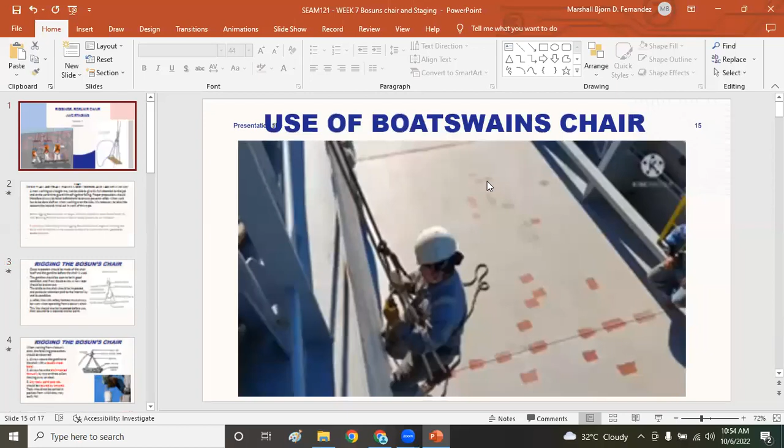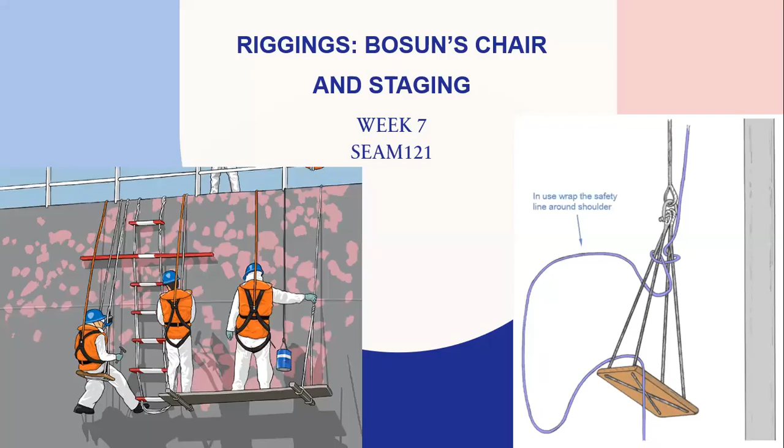Our topic is about the rigging of bosun's chair and staging. These are the learning objectives: identify safe and unsafe practices when working aloft and working overside.

A man working at a height may not be able to give his full attention to the job and at the same time guard himself against falling. Proper precautions should therefore always be taken beforehand to ensure personal safety when work has to be done aloft or when working over the side. It is necessary to take into account the hazards involved in work of this type.

When rigging bosun's chair or stages, when we say stages, gentlemen and ladies, it's about the gondola. The term for that is gondola, and bosun's chair is different. With the gondola, it utilizes or requires two persons.

Reference should be made to the Code of Safe Working Practice to ensure that all safety procedures are followed. It should be noted that prior to rigging bosun's chairs or stages, or carrying out working aloft or working overside, a risk assessment should be conducted and permit to work obtained.

So gentlemen and ladies, those are the documents needed: permit to work and risk assessment. That document is prepared by the Chief Officer for the deck crew or deck personnel led by the bosun, of course.

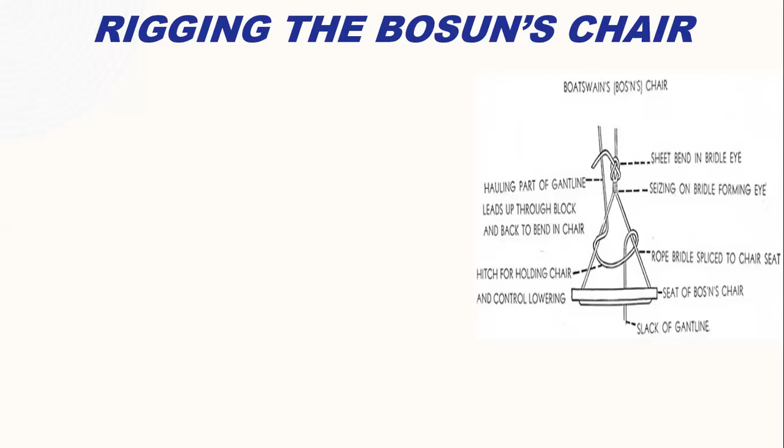Close inspection should be made of the chair itself and the gantline before the chair is used. It means you should do visual inspection. You will check those lines if it has a lot of abrasions or some strands that are broken, or probably the wood or wooden chair is already broken or has some cracks on it.

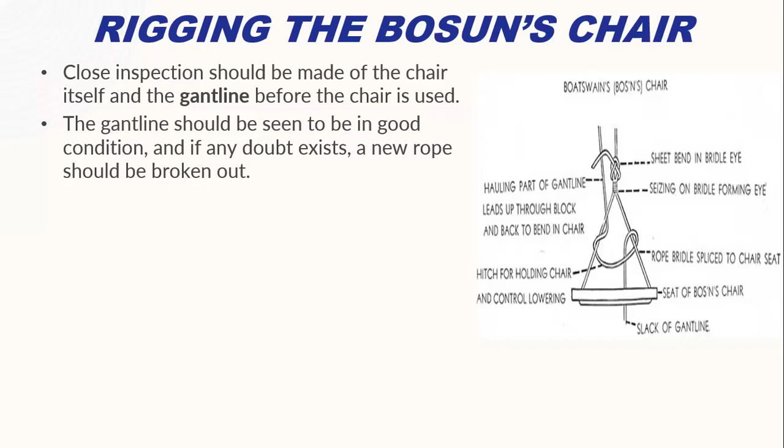The gantline should be seen to be in good condition. If any doubt exists, a new rope should be broken out or taken out. If it requires new rope, then use a new rope. The bridle to the chair should be inspected and particular attention paid to the internal lay and its condition.

Safety line with safety harness must always be worn when operating from a bosun's chair. For the purpose of safety, it's not safety belt anymore, but safety harness. When you wear a safety harness, it ties all around your body, so that is much safer. Even though you are riding the bosun's chair while probably painting or working aloft, you need to wear safety harness. That's for emergency.

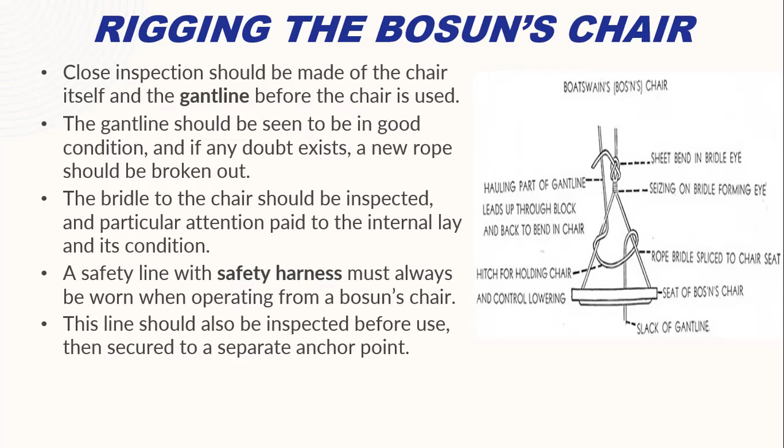This line should also be inspected before use, then secured to a separate anchor point. When you say separate anchor point, it is fast in a strong point on deck, so even if you fall, it is capable of withholding your weight, saving you from harm.

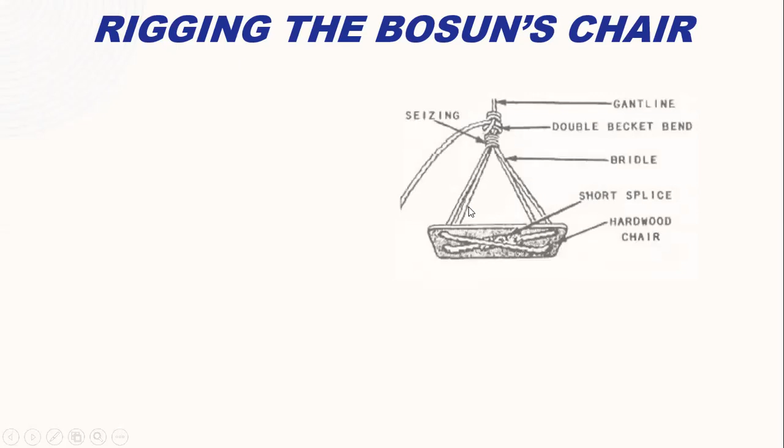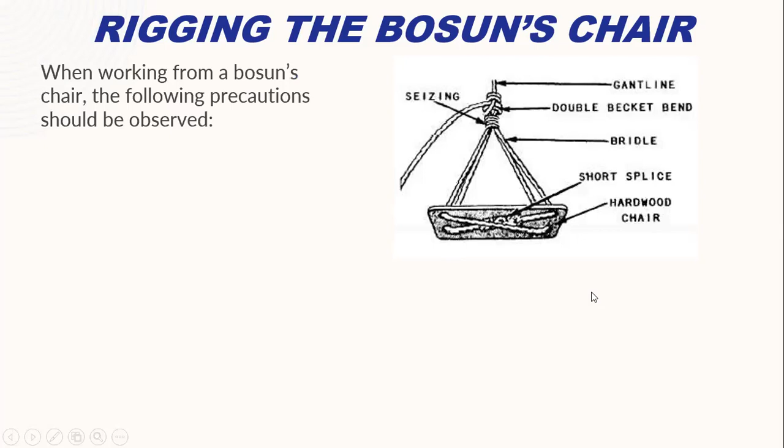Rigging the bosun's chair: there's a gantline, double becket bend, bridle, short splice, hardwood chair. When working from a bosun's chair, the following precautions should be observed. Always secure the gantline to the chair with a double sheet bend.

Always have the chair hoisted manually by two or three sailors heaving away on deck. Any tools, paint pots, etc., should be secured by lanyards. Tools should not be carried in pockets from which they may easily fall. So, for example, if you are painting, it should be tied in a heaving line, separate from yourself and from the bosun's chair itself.

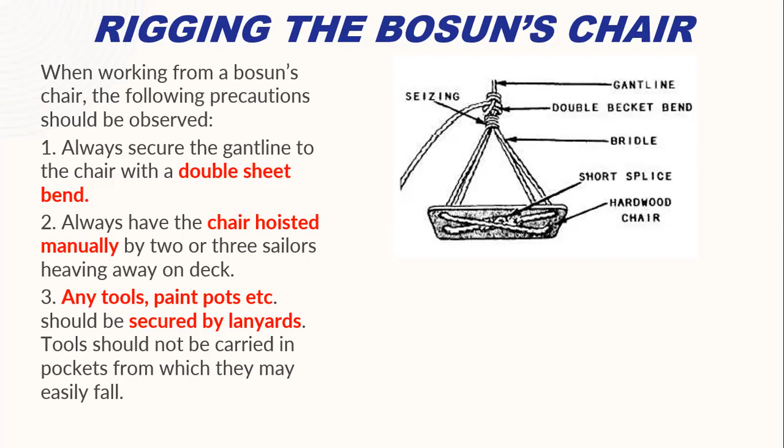It shows or seems like this picture.

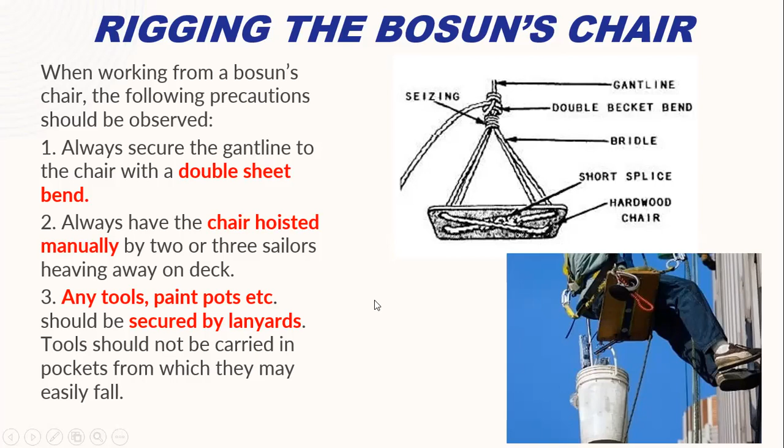So these are the precautions. When riding a stay, it is essential that the bow of the shackle, and not the pin, rides on the wire. The pin in any case should be seized, and it should look like that.

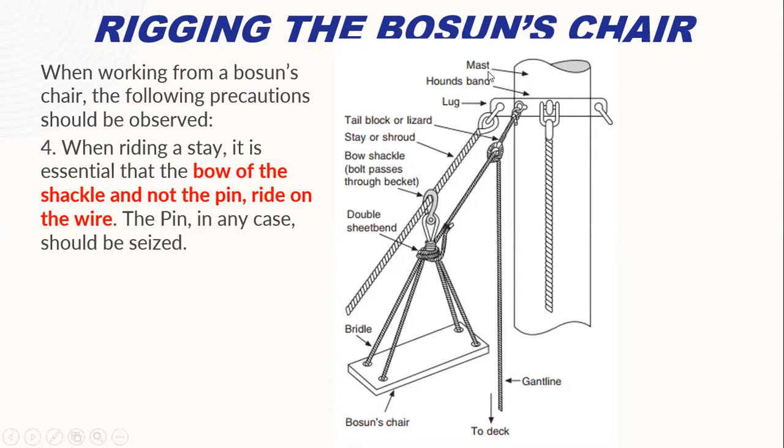Okay, bow shackle, this is the bow shackle, and there's a double sheet bend. And this is your gantline. Gantline is the line where you can adjust. The double sheet bend, you also adjust here. And with the gantline, it is fast on deck. For example, if you are working on the mainmast.

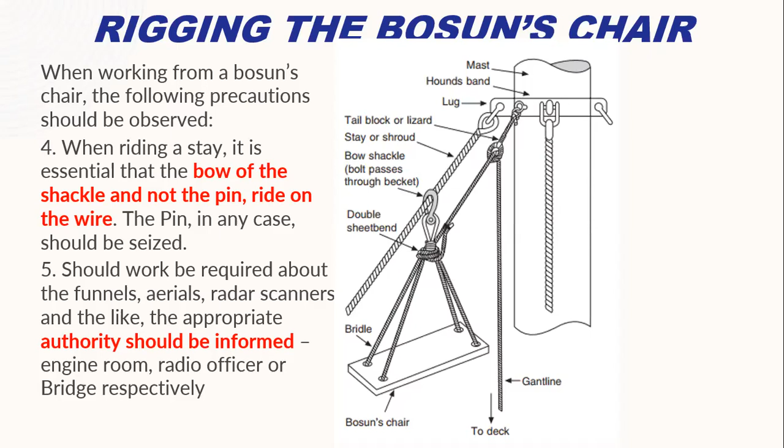Should work be required about the funnels, aerials, radar scanners, and the like, the appropriate authority should be informed. Who are those? Of course, it's the master or the chief officer, engine room, radio officer, or the bridge duty officer, respectively. So that is the funnel, working in a funnel.

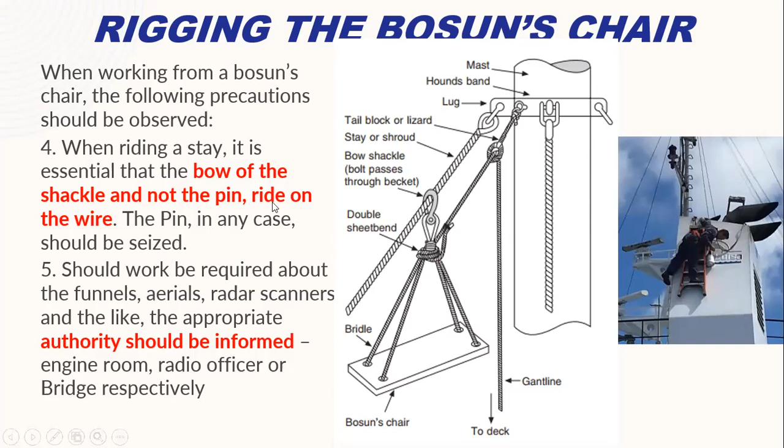The lowering hitch is normal when the chair is to be used for a vertical lift. The man using the chair should make his own lowering hitch. Care should be taken, whether making a vertical lift or when riding a stay, to ensure the tail block or lizard, whichever is being used, is weight tested to check that it's properly secured and will take the required weight.

When it's necessary to haul a seafarer aloft in a bosun's chair, it should be done only by hand. A winch should never be used. So when you use the bosun's chair, it is manual, lowering by the weight of the person sitting or riding on the bosun's chair itself. You shouldn't use the windlass or the winches just to hoist or heave up the person riding the bosun's chair.

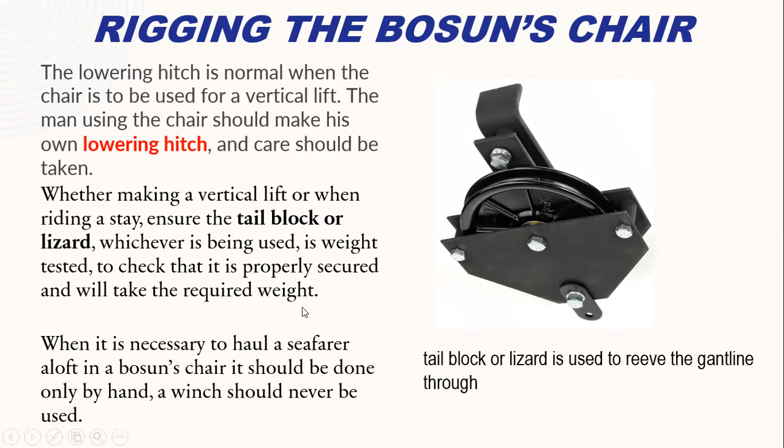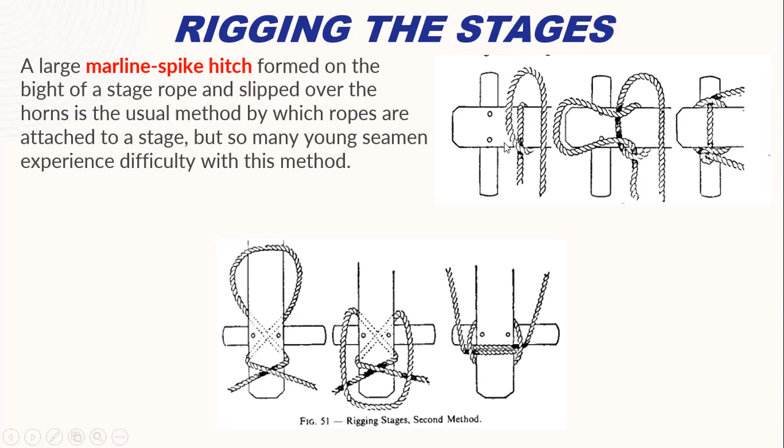A large marline-spike hitch formed on the bight of the stage rope and slipped over the horns is the usual method by which ropes are attached to a stage, but many young seamen experience difficulty with this method. So first, it should look like this. You can see my arrow from the left going through here, and this one, and this one also. Okay, this is another method.

I will show you the video later on, so no worries about that. Check that the stage is clean, free from grease, that the wood is not rotten, and that the structure is sound in every way.

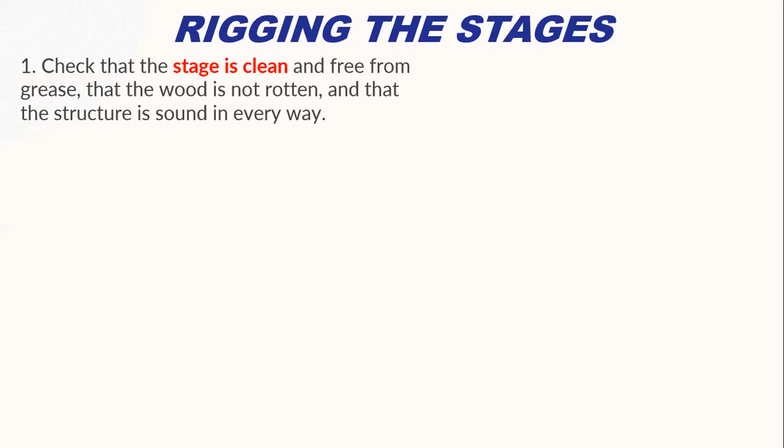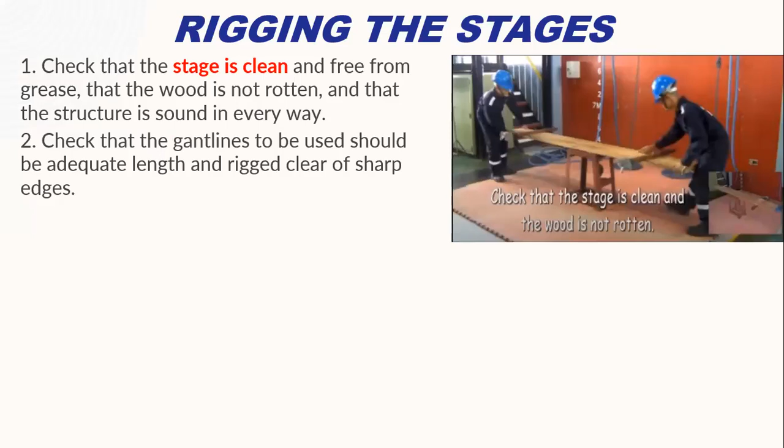Number 2, check that the gantlines to be used should be of adequate length and rigged clear of sharp edges. It should be long and rigged clear of sharp edges, or it shouldn't have any abrasions or taken off strands.

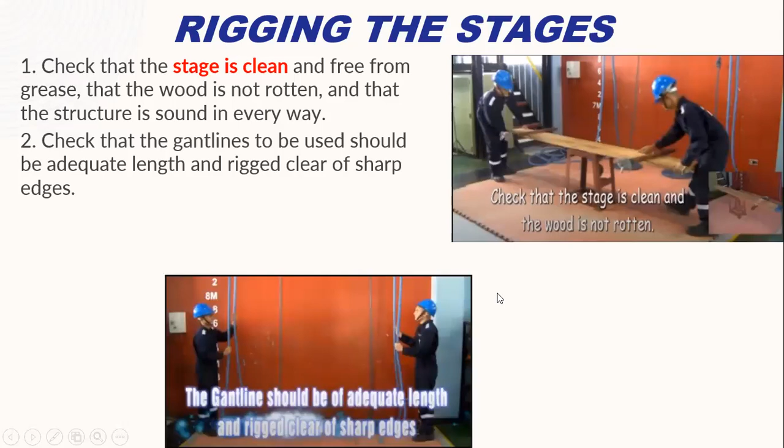The stage should be load tested to 4 times the intended load, as per the code of safe working practices. So 4 times your load or your weight. For example, if you are 75 kilograms, times 4, that is 300 kilograms. That's the way to test it, the stage should be tested up to 4 times. For this picture, it is not tested as per 4 times. No, you have to test it 4 times.

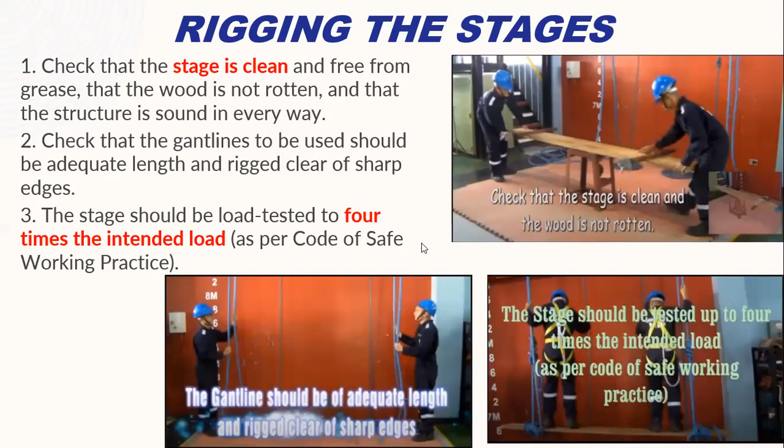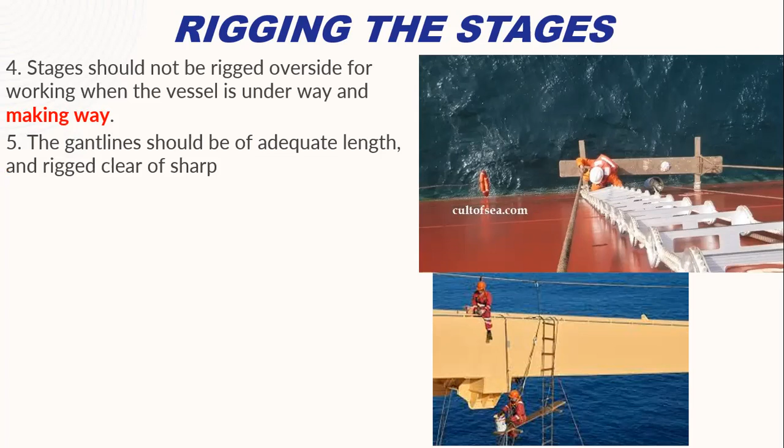Stages should not be rigged overside for working when a vessel is underway and making way. The gantline should be of adequate length and rigged clear of sharp objects or edges, which could cause a bad nip in the rope. A correct stage hitch together with lowering turns must be applied.

The lowering turns must be seen to be running on opposite sides of the stage to prevent the stage from tilting. Take 2 or 3 round turns around the stage and then belay the downhaul around the horns. One to the inboard and the other to the outboard.

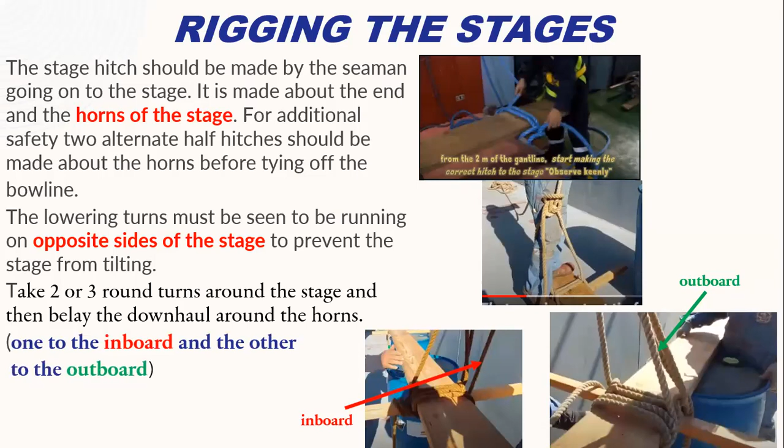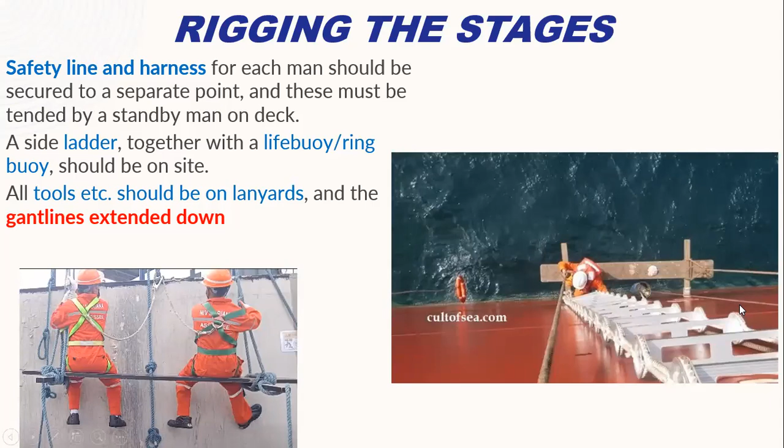Okay, rigging and rigging bosun's chair. Let me show you the video. If there's any problem, gentlemen, you can just watch it on the module 7 later. Okay.

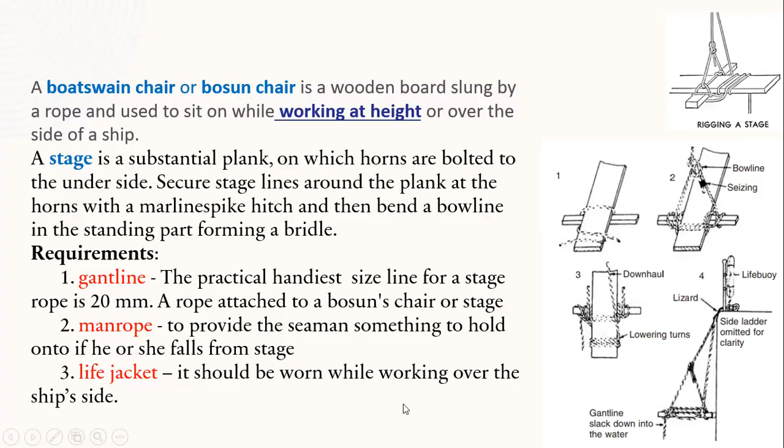So requirements are gantline, man rope, and life jacket. Of course, life buoy. Okay. So this is the video that I've attached about the use of bosun chair and also staging, also known as gondola. Understood, gentlemen? Yes, sir.

All right. So if that's the case, since you are not able to watch the video itself, I'm just going to attach it on the modules. Thank you very much. That's about bosun chair and stages or gondola. Questions?